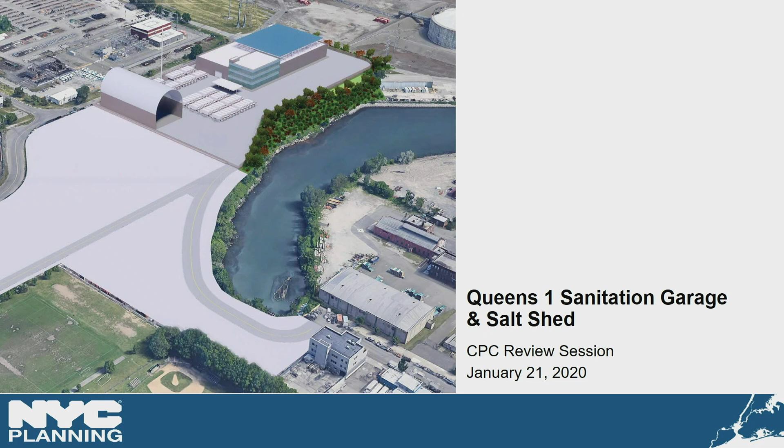Good afternoon, Commissioners. This is a city-sponsored application to facilitate the development of a new sanitation garage and salt storage shed in the Astoria Industrial Business Zone in Community District 1, Queens. Apologies, it's not advancing. Perfect, thank you.

The Department of Sanitation and the Department of Citywide Administrative Services seek to acquire an approximately 9.8 acre development site, as well as a vehicular driveway and a utilities easement. The requested actions would allow DSNY to build just under a 94,000 square foot sanitation garage and a 20,000 square foot enclosed salt storage shed with surface parking and fuel stations for DSNY vehicles. The sanitation garage would service Queens Community District 1, and the salt shed would service Districts 1 and 3.

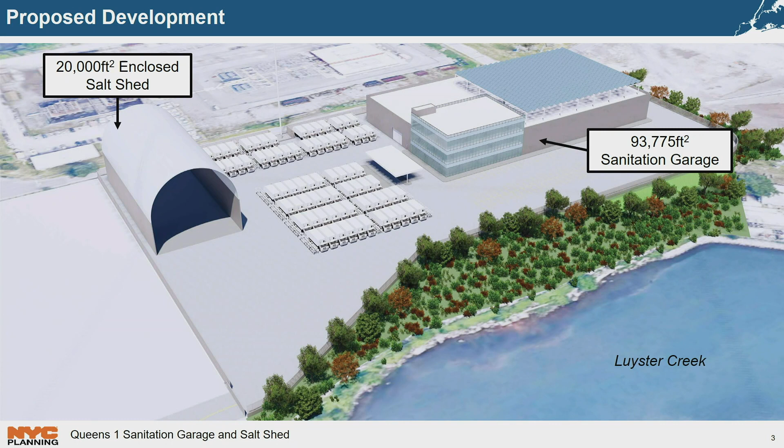The existing sanitation garage, shown here on the left, was constructed in 1931. It's surrounded by the Ravenswood Houses NYCHA community, and it is next to a playground. Local residents have expressed health and quality of life concerns for years due to the presence of diesel-powered sanitation trucks idling in this residential neighborhood. The garage is also structurally deficient and undersized for DSNY's current and future needs.

In 2017, Mayor de Blasio committed $130 million from his executive budget to build a new garage and relocate the services in this existing garage to a new location. DSNY is temporarily using a portion of the proposed site for vehicles that do not fit in this garage. On the right is an image of the existing unenclosed salt pile located in a mapped but unbuilt section of 43rd Avenue at the intersection with Vernon Boulevard. DSNY would relocate the salt pile as part of this proposal as well.

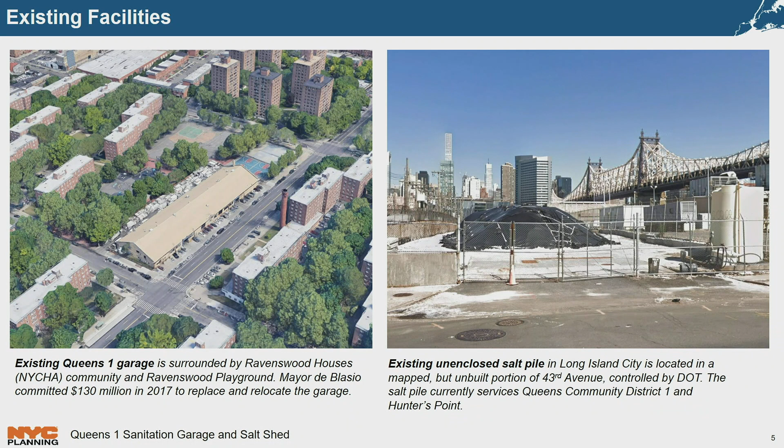The Q100 bus stops near the project area on 20th Avenue, providing access to Long Island City and Rikers Island.

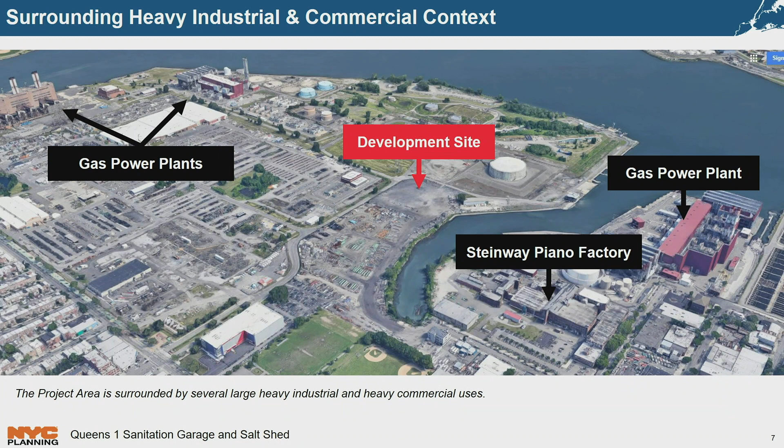DSNY did an alternate site analysis but found there were no city-owned sites of adequate size in the community district, and that other privately owned sites were not well located for efficient service delivery for the district garage. The industrial business zone is anchored by several large, heavy industrial uses, including 3 gas power plants and the Steinway Piano Factory.

This is an illustrative site plan of the proposed development. The development site, including the garage and salt shed, would be located on the northern end of the project area, shown here on the right side of the image. DSNY vehicles would access the development site through an entrance at 19th Avenue, at the bottom middle of this image. A utilities easement would also be established between the development site and 20th Avenue, shown on the left side of the image.

Remaining portions of the site would be privately owned and would primarily be used for vehicular storage by private companies.

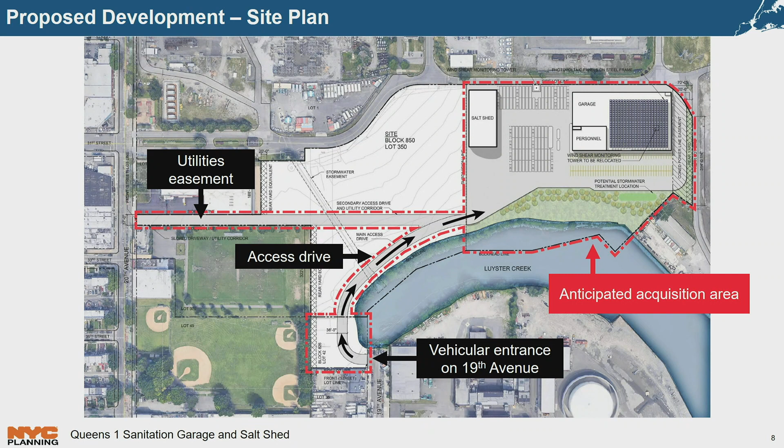The proposed facility would operate 24 hours a day, 7 days a week, with limited operations on Sundays. Their current facility in Ravenswood has about 155 total personnel, with about 75 personnel at their peak 6 a.m. to 2 p.m. shift. Their workforce would include field workers, as well as supervisors, mechanics, and clerical personnel who would work on site, and they would provide employee parking on site.

DSNY is also thinking proactively about the future of their facility. Their building would be designed for useful life through at least 2100, and therefore they would design for a 3-foot sea level rise over that period of time.

The garage, parking lot, fueling station, and salt shed would be built to an 18-foot design flood elevation, and mechanical systems and emergency generators would be placed on upper levels of the garage.

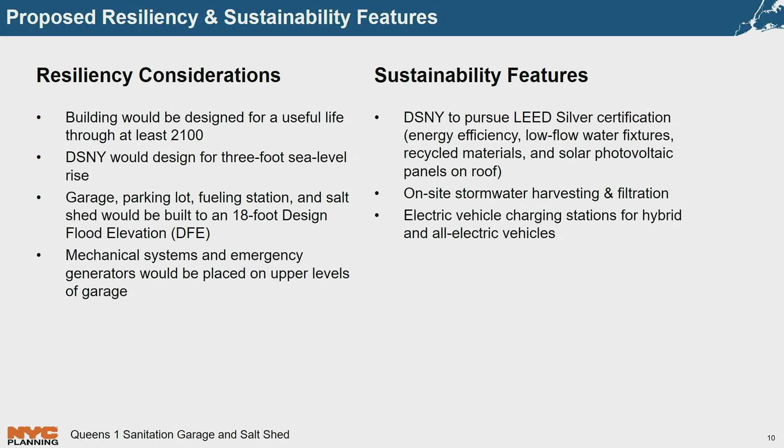DSNY will also seek LEED Silver certification for the garage, and among other features, it would include a solar photovoltaic panel system on the roof of the garage. They're also planning to include on-site stormwater harvesting and filtration of that stormwater on-site, as well as electric vehicle charging stations for their current hybrid and all-electric vehicles, and in anticipation of a future all-electric fleet.

DSNY believes the proposed site would be an appropriate location for the proposed sanitation garage and salt storage shed. This application is also the first step in the mayor's strategy to relocate and replace the current Ravenswood garage, which is not suitable for DSNY's needs or the surrounding community.

Thank you. Questions or comments from the commission?

Commissioner de la Uz: Thanks for the presentation, and it's great that the sustainability features are part of what's being highlighted and planned for, and the resiliency features as well. I'm wondering, when it comes back, if they could talk about whether or not they considered also doing photovoltaic panels above the parking. Sure.

Other questions? Vice Chair Knuckles: I assume an 80-year presence at the current site connotes city ownership, or does it? It is a city-owned site.

So at this point, is it too early to consider what the use would be for the current site? The city is exploring options, but the city is not able to provide a path forward at this time.

Well, whatever the decision, I would hope it would inure to the benefit of the NYCHA residents that have endured for so long the current usage. Absolutely. Other questions? Commissioner Levin.

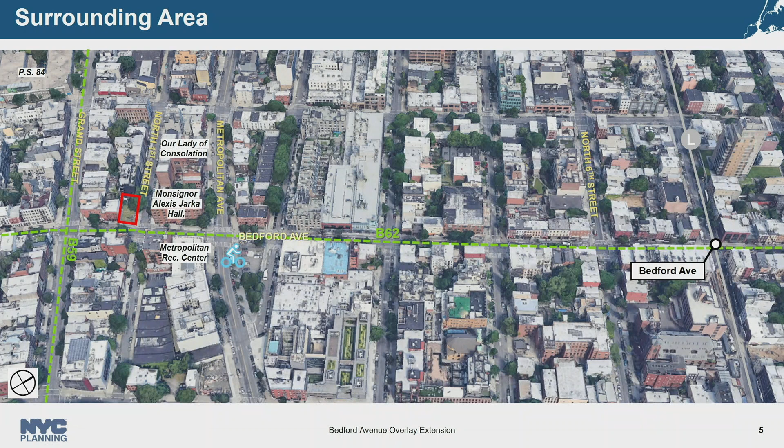The project area is located on block 2380 at the southwest corner of Bedford Avenue and North First Street, and is approximately 2,500 square feet, with a frontage of 100 feet on North First and 25 feet on Bedford Ave. Included in the project area is the development site and a portion of the adjacent lot, which is a condo building with 5 stories and 8 units.

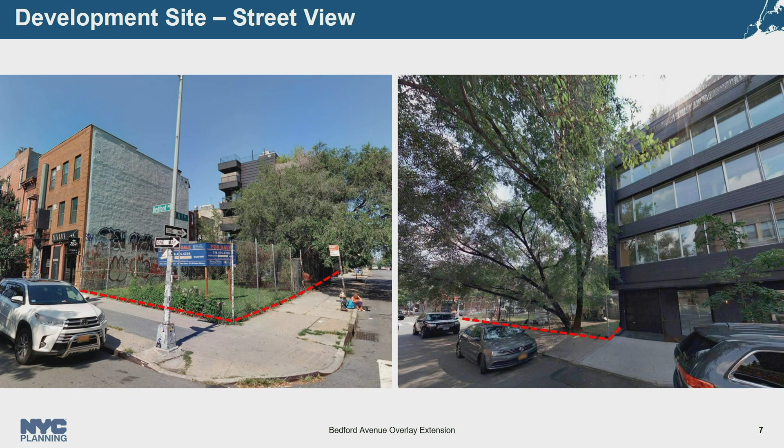Here we have Bedford Ave, a commercial corridor with ground floor local retail. This is the west side of Bedford, between Grand and North First. The development site is on the right, on the north side of the block, with mixed use and residential buildings adjacent. Both of these buildings have restaurants on the ground floor and residential units above. Across the street, on the eastern side of Bedford Avenue, is a similar mixed-use context with a cheese shop on the left with residential above, and a grocery on the right side.

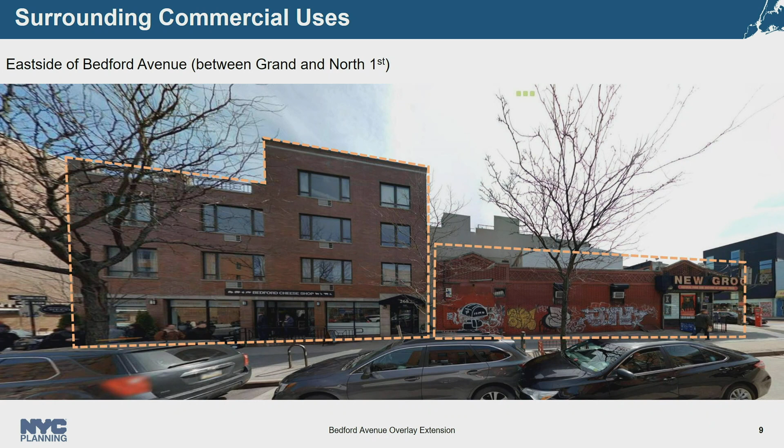The applicant proposes to construct a 3-story mixed-use building on the development site at 39 feet. The proposed development will be a full lot coverage building with a total of approximately 5,500 square feet, with 2,300 square feet of ground floor commercial use and 3,200 square feet of residential floors on the upper 2 floors. The development will also include a cellar level dedicated to storage for the ground floor commercial use and building mechanicals.

The applicant is seeking a zoning map amendment to establish a C24 commercial overlay in an existing R6B zoning district. This amendment is necessary to facilitate the development of a new mixed-use building on the development site and fully establish a C24 commercial overlay along Bedford Ave. The proposed zoning map amendment reflects the character and existing zoning of the area, where C24 commercial overlays are mapped over several blocks near the rezoning area.

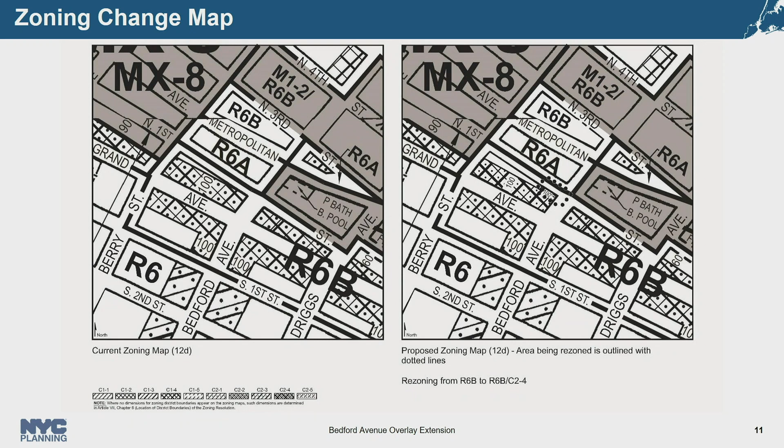As you can see from these 2 zoning maps, the existing overlay is mapped 100 feet from Grand Street, but due to the irregular shape of the block, it does not cover the northwest portion of the block on Bedford Ave frontage. So the proposed map amendment will map the C24 overlay over the remainder of the block. It will be 100 feet from Bedford Ave, thereby extending the overlay over the full portion of the block and Bedford Ave frontage. And that concludes my presentation.

Questions from the commission? Commissioner Bernie: Will the architect be coming to the public hearing? There are some strange things about the building design that we might want to discuss. I will note that, to see if it'll be a team presentation. At this point, we're at certification, and we'll see it again at pre-hearing review once we have the community and the borough president's input. Other questions?

Commissioner Levin: Well, I think I know the answer to this, but it seems odd that we would be zoning a portion of the adjacent lot, putting the overlay on a portion of the adjacent lot, newly constructed, unlikely to change its use. Why are we not just mapping the site itself?

So we're mapping it 100 feet from Bedford Ave, so it covers a portion of the adjacent lot. Having a rational zoning map was the reason for having it 100 feet from Bedford Ave rather than just the site. Yeah, okay, I figured that was the answer.

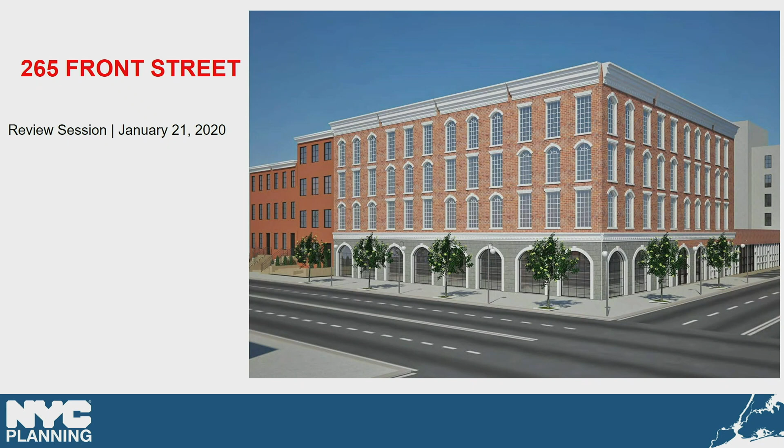The third item on our agenda, page 48, is a certification of a zoning map and zoning text amendments in Brooklyn Community District 2. Syed Ahmed is our presenter. Good morning, Commissioners.

This is a private application requesting a zoning map amendment from an M12 to an R6A C24 district and a zoning text amendment to establish the project area as an MIH area. The proposed actions would facilitate a mixed-use 4-story building with 9 apartments and approximately 5,000 square feet of ground floor commercial space.

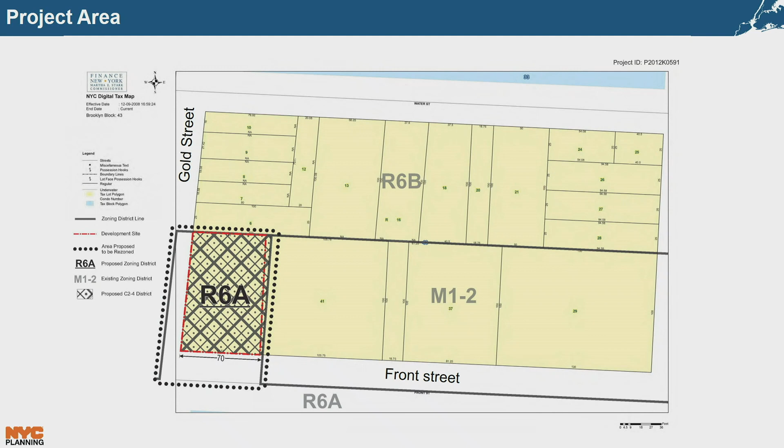The project area is located at the northeast corner of Gold and Front Streets in the Vinegar Hill neighborhood of Brooklyn Community District 2. Vinegar Hill is a small neighborhood with 2 to 3 story historic residential buildings, residential and commercial loft buildings, and industrial uses. This small neighborhood is surrounded by large-scale city infrastructure.

To the north, several blocks along the East River waterfront are zoned M31 and are occupied by Con Edison's Farragut electric substation and a steam generating plant. A block to the east is the 225-acre Brooklyn Navy Yard. Area to the south is zoned R6A and is developed with PS 307, NYCHA's 1,400-unit Farragut houses, and the entrance to the Brooklyn-Queens Expressway. The area to the west is developed with a mix of residential and commercial loft buildings, industrial uses, and Manhattan Bridge.

In 1997, the Landmarks Preservation Commission designated 3 small clusters of row houses dating back to the 1780s as Vinegar Hill Historic District. Area 2 of the historic district, consisting of 5 attached homes, is directly north of the project area.

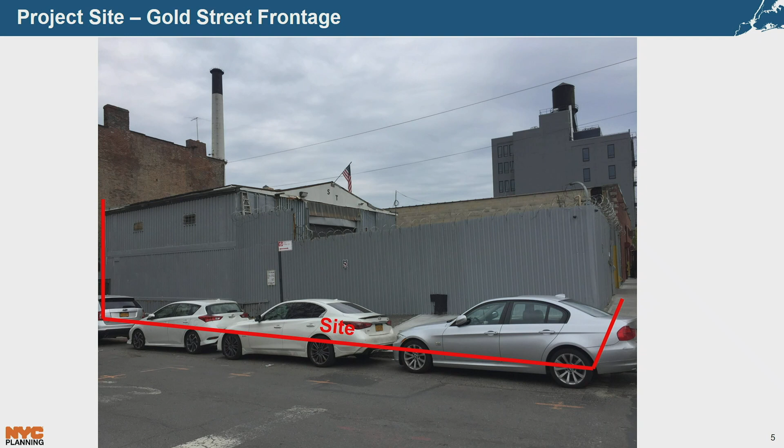The applicant site is a corner lot currently occupied by a storage shed and a parking lot.

The subject block is split into 2 zoning districts. The northern half is in an R6B residential district consisting of 16 tax lots, 10 of which are developed with residential buildings containing 28 dwelling units. The remaining 6 lots in the middle of the block are used for warehousing and open storage.

The southern portion of the block is zoned M12, comprising 4 industrial lots, including the applicant's Lot 1 at the corner of Gold and Front Street. These lots are used for industrial uses, including open storage and warehousing.

The project area is well served by public transit. The F-Line York Street Station is 2 blocks west of the site. B62 and B67 bus lines also serve this area.

The proposed rezoning will extend an existing R6A district from the south side of Front Street at a width of 70 feet from Gold Street onto the project area.

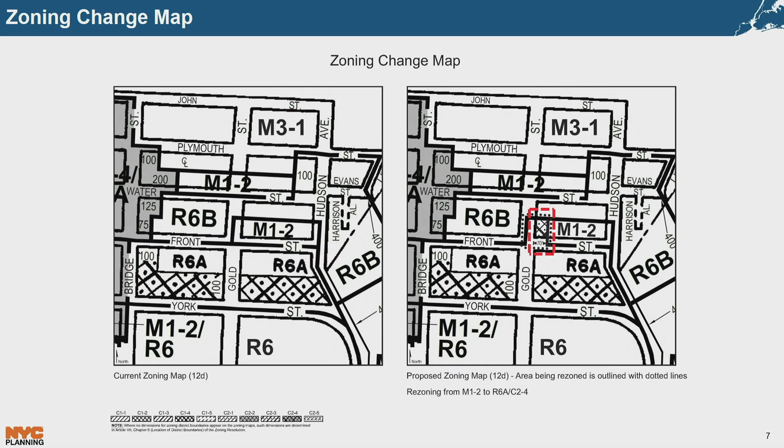Commissioner De La Uz: It'd be helpful when this comes back to find out if they have an intended use for the commercial space. It seems like you already have an answer. No, I will find out. Okay.

And obviously, when it comes back, I'd like to understand the rationale for mapping MIH option 2 versus option 1 and 2, despite the fact that they're below the threshold. Yes, they are building below the threshold because height is an issue, and they have approached the community board two, presented this project, and they have gotten positive feedback, and that's their explanation. Positive feedback on option 2, or positive feedback on FAR? Okay, yeah, that's different.

Yes, I hear that piece of it, considering the historic district in the area. They proposed option 2, and I know, but because we might see other applications similar to this in the future, and given the need that exists in the community, and the fact that one application kind of lays the groundwork for the next one, I would like to know the rationale for only mapping one of the two options that exist. When they come back, ask them for that rationale. When they come back, yes.

Great, thanks. Other questions? Commissioner Levin: Sorry, it's been a long time since we've seen you, so hope you've been good. Yes, I have. I have a question about the proposed zoning that's being mapped here.

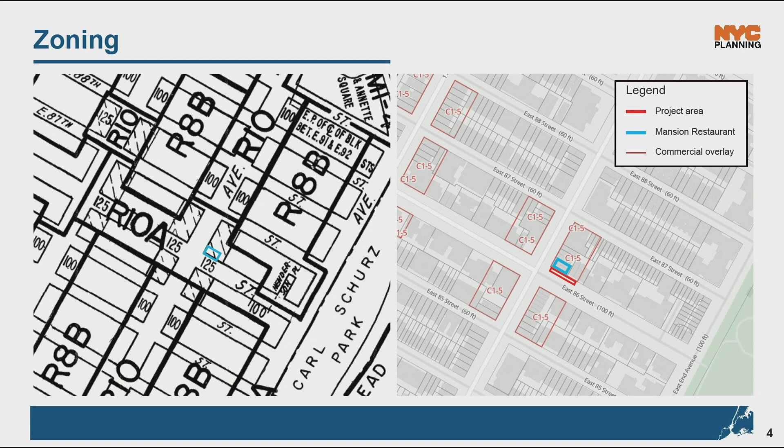The present mapping of sidewalk cafes in the area is shown here. The Mansion Restaurant can be seen in blue. The category of unenclosed sidewalk cafes was established in 2004 and broadly mapped via CPC action.

It is defined as an outdoor area on the public sidewalk in front of the restaurant that contains removable tables and chairs. The general approach taken to mapping sidewalk cafes can be seen to follow a pattern of tracing the avenues and then extending no more than 125 feet along each street toward the mid-block, matching the commercial overlay.

The exception of this is 86th Street. Between the East River and 5th Avenue, 86th Street was removed from the 2004 action at recommendation of Manhattan Community Board 8. The recommendation was made due to a streetscape improvement plan for the East 86th Street corridor, which had been proposed by the 86th Street Neighborhood Association. CB8 stated in its 2004 resolution, this prohibition for 86th Street may be revisited at some future time.

The portion of 86th Street identified in purple reflects a 2008 CPC action to allow the length of 86th Street from 1st Avenue to a distance 125 feet from 2nd Avenue to permit small sidewalk cafes. That action permitted the Maz Mezcal restaurant to apply for and operate a small sidewalk cafe in a similar manner to that proposed by the current application.

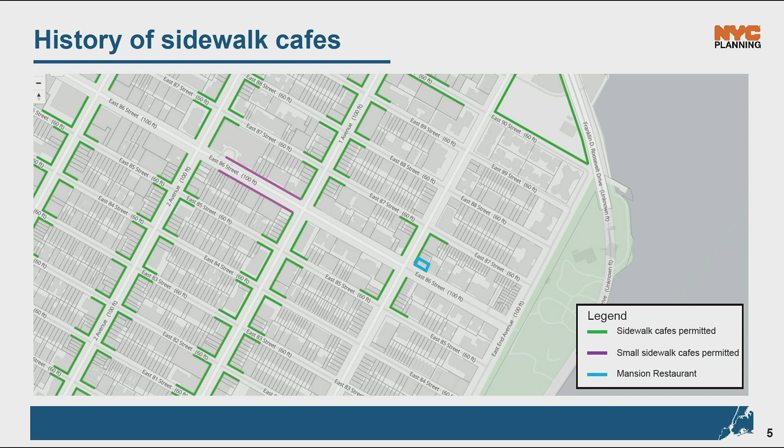The 86th Street Streetscape Improvement Plan, noted in 2004, was updated and implemented by DOT and DDC in 2015. The intent of the plan was to make improvements to the thoroughfare while facilitating the M86 SBS bus service, which runs along 86th Street and to the north on York Avenue, which you can see in the map there.

Improvements included the addition of bus boarding bulbs and neck downs at intersections, as well as landscaping and adding street furniture. The project area is not located in proximity to any of the infrastructure related to the M86 SBS service, nor other improvements made as part of the 86th Street Streetscape Improvement Plan.

So the proposed extent of unenclosed sidewalk cafe for the Mansion Restaurant is highlighted here in red. The proposal will amend Section 14-41 of the zoning resolution to allow sidewalk cafes in the project area only. It also amends 14-42 of the zoning resolution to clarify that enclosed sidewalk cafes are not permitted on 86th Street between the East River and 5th Avenue.

The proposed 125-foot extent of the project area is consistent with the length applied to sidewalk cafes along streets in the area and corresponds with the extent of the C1-5 commercial overlay. The Department of Consumer Affairs applies design and operational regulations to sidewalk cafes through licensing. Through this license, the applicant would expound on matters including table and chair layout, clear paths along the sidewalk in lieu of obstructions, which is generally required to be 8 feet, staff servicing, associated canopies, and operation hours.

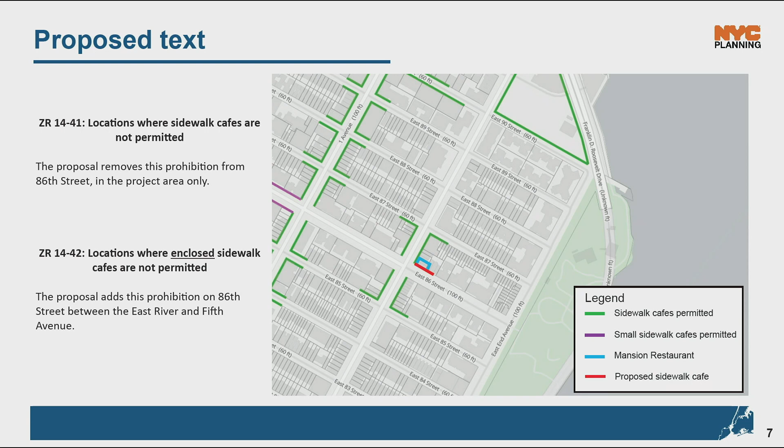In summary, the application does not involve any construction, nor does it request any layout endorsement from the CPC. The applicant seeks only approval for a zoning text amendment for Section 14-41 and 14-42 of the zoning resolution. Subject to licensing, the text amendment would allow a 125-foot length of the sidewalk on the northern side of 86th Street to be used for unenclosed outdoor cafe purposes. Happy to take any questions you might have.

Questions from the commission? Commissioner Burney: So would this text amendment apply to other properties now that might want sidewalk cafes on 86th Street, or only to this applicant? Response: So to this applicant, but it also extends 125 feet into the block. So the Mansion Restaurant takes up 75 feet of that. The neighbor that is under construction, the taller building right next to it, has some frontage that would then be allowed to have sidewalk cafes if they applied for a license.

But the DOB filings of that indicate that it's not intended to be used for retail, so whether they would have any utility for that would be the question. But if we've decided that the streetscape studies has been completed and executed, and now the reason to have a ban on sidewalk cafes is no longer relevant, why wouldn't we just change it for the whole of 86th Street? Yes, that would make a lot of sense.

That would also be quite a heavy ask for a private applicant to be able to facilitate the whole of 86th Street. There would likely be some environmental review implications and things like that, so that would potentially have to be more of a departmental initiative.

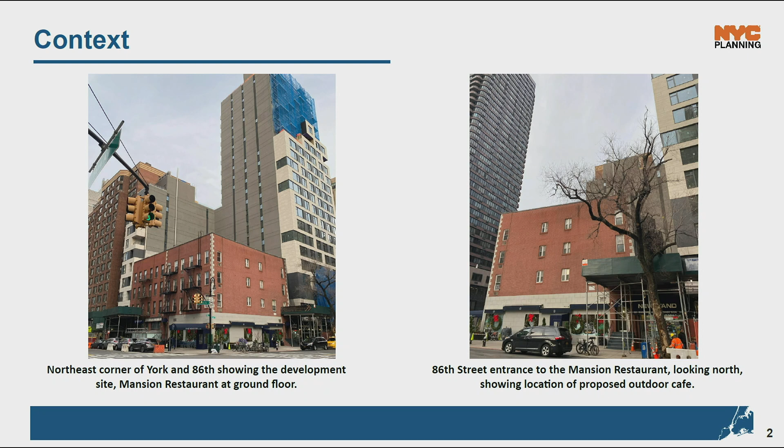Other questions? Okay, so this will get referred to both the community board and the borough president for 45 days. Thank you.

The fifth item on our agenda, page 87, is a pre-hearing review of a notice of intent to acquire office space in Queens Community District 7. Our presenter is Kai-Kung Yang.

This is a notice of intent by DCAS and Queens Community Board 7 to acquire 1,900 square feet of office space at 30-50 Whitestone Expressway, College Point, Queens, Community District 7. Queens Community Board 7 is seeking relocation of office space because their current lease is not being renewed by the landlord. The proposed office space is within the Special College Point District, created in 2009 to facilitate business park development.

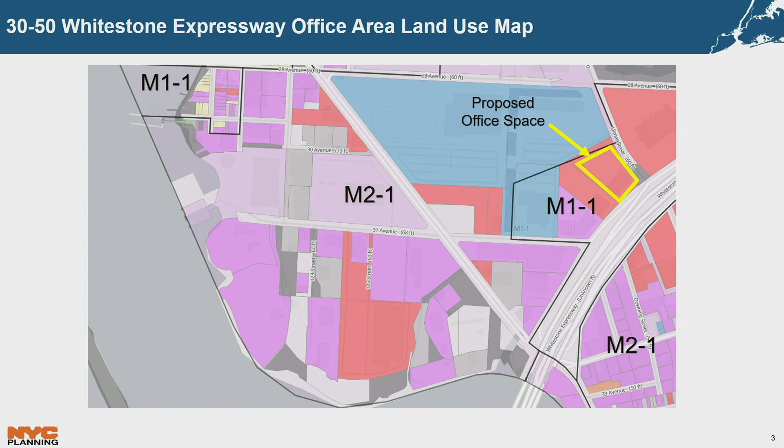It's located in an M1-1 zone, which permits light industry uses at an FAR of 1.0.

The office space would be relocating from downtown Flushing, approximately 1 mile north to 30-50 Whitestone Expressway between Ulmer Street and 31st Avenue. Nearby transit includes the Q25 at the Whitestone Expressway and Linden Place intersection, one block north, and Q65 at the College Point Boulevard and Whitestone Expressway intersection, 1 block south. Approximately a mile to the south is the termination point of the 7 train in Flushing, as well as the Port Washington LIRR station.

Nearby development is a mixture of corporate business parks, big box retail, municipal agency operations, and open industrial uses. Adjacent uses include the multiplex cinema movie theater located adjacent to the north, a beauty supply warehouse, and an office of an electrical company located adjacent to the south. There is also a high concentration of public facilities within a few blocks, including the DMV, NYPD's Tow Pound and Police Academy, and further west, the Department of Sanitation's North Shore Marine Transfer Station.

The 30-50 Whitestone Expressway building is a 4-story, 105,000 square feet office building with approximately 310 surface parking spaces. Uses in the building include several office uses for insurance companies, a nursing school, an accounting firm, and supermarket association. This office would host Queens Community Board 7 for a 20-year lease period.

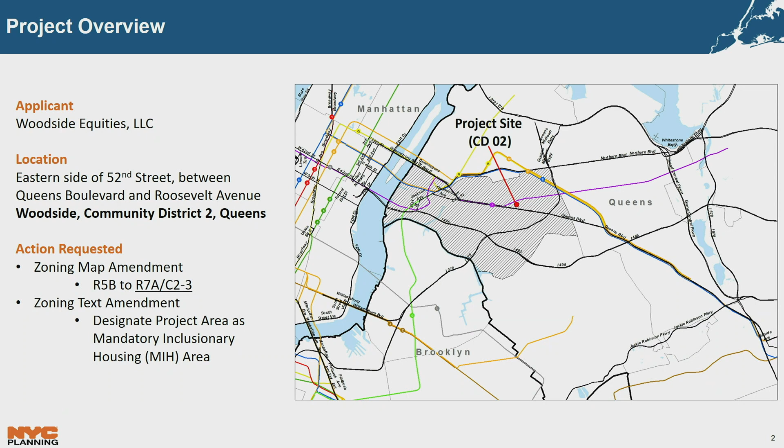A zoning text amendment is also proposed to designate MIH. Quick background on land use actions in the area: the project area, located on the eastern side of 52nd Street between Queens Boulevard and Roosevelt Avenue, was rezoned from R6 to R5B in 1992, a result of the city-sponsored Woodside rezoning.

In 2006, the Maspeth Woodside rezoning changed the M1-1 district to the west to R6 C2-3, and the C8-1 to the south along the Queens Boulevard corridor to R7X C2-3, also establishing the borough's first MIH area. The project area was not affected. The Sunnyside Woodside rezoning added some contextual districts to the north; again, the project area was not affected.

Surrounding area is characterized by a mix of types and densities, mixed use higher density along Queens Boulevard, lower density to the east.

The project area consists of approximately 33,000 square feet across portions of 11 tax lots. The development site owned by the applicant occupies tax lots 12, 15, 16, and 17, approximately 15,000 square feet. Lot 12 is occupied by a warehouse that has been vacant since 1996.

Until that time, the applicant operated a baby accessories and clothing distribution facility here. They have since moved to Jamaica, where they still operate. The 3 other tax lots of the development site are currently vacant. The 2 lots south of the development site, lots 10 and 7, are occupied by a 2-story house of worship and a 1-story non-compliant auto repair shop.

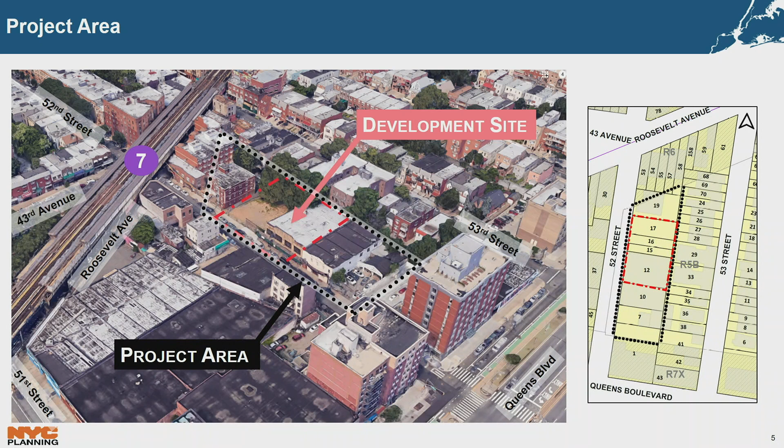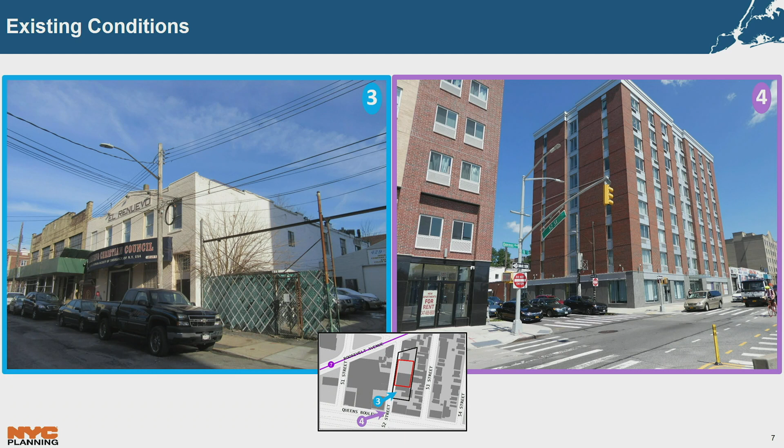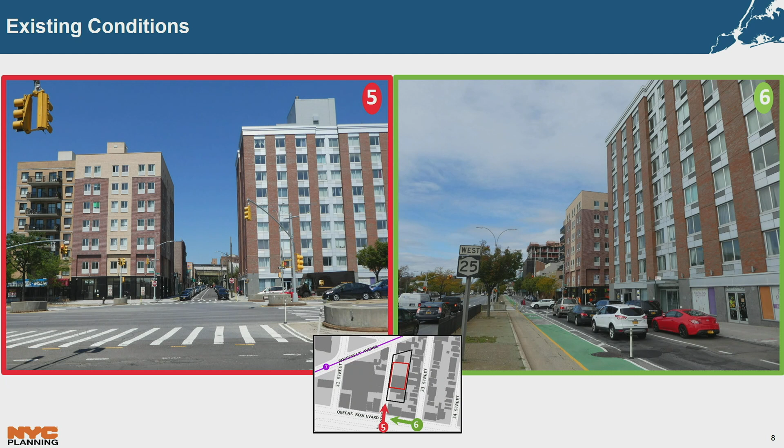You'll see a lot of green fence lining up here. There's a lot of active, as-of-right construction projects going along here.

When certified, the proposed development was an 8-story building containing 61 units with rather underwhelming illustrative drawings. The applicant has since updated their drawings, but also the programmatic side of the project.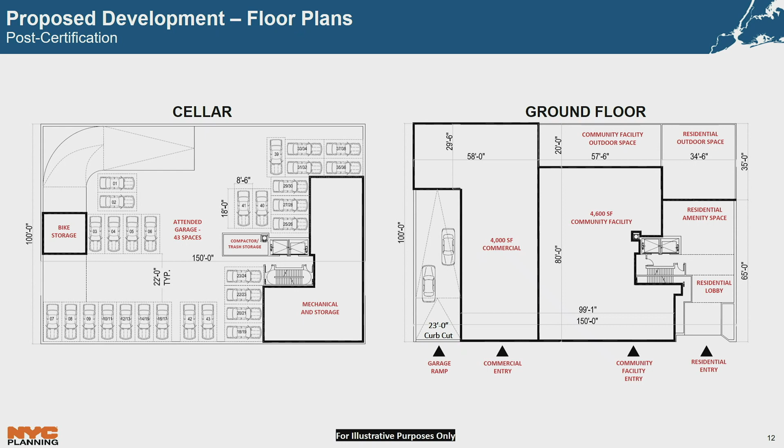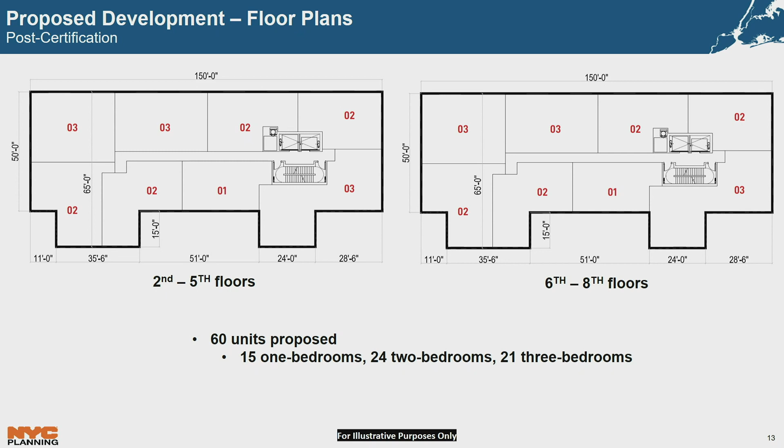Here are drawings of the floor plans showing the mix proposed currently: 15 one-bedrooms, 24 two-bedrooms, 21 three-bedrooms. This was in response to Community Board 2's request for additional family-friendly dwelling unit sizes.

They're proposing to map both options 1 and 2 for flexibility. They have engaged with an affordable housing consultant, and they expect to be able to expand more on the preference for option 2 while still mapping both 1 and 2.

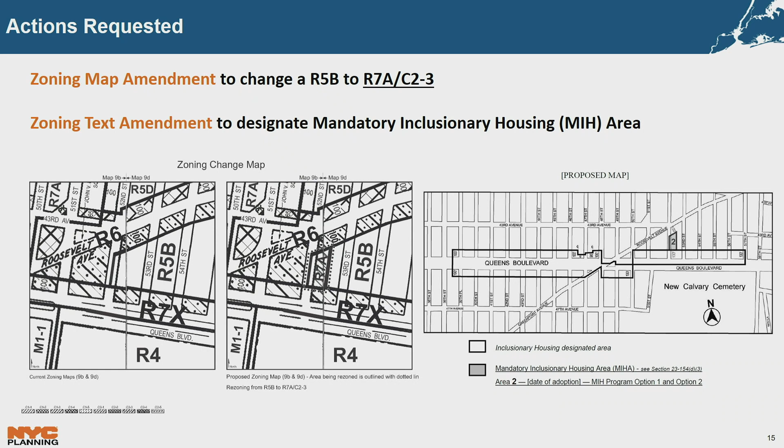On November 7th, 2019, Community Board 2 adopted a resolution recommending approval, 18 in favor, 11 opposed, 0 abstaining, with the condition that community facility space be set aside on the ground floor, preference for a green roof, and other environmentally friendly design standards be used. The architect tomorrow will go into detail on how those will be used.

A preference for option 1 to be mapped. Also, as with prior projects in Queens, this sort of fell through the cracks of the borough president. There were one or two others that fell through, but she did not schedule a hearing nor issue a recommendation. And that is the conclusion.

Questions from the commission? Commissioner Levin.

I gather the community facility space came about at the request of the community board? Yes. Do they have a particular tenant they'd like to see in that space? Yeah, there is preference for anything other than essentially medical offices, maybe a UPK type of facility. It's a rather small square footage that may not be conducive to that. There was discussion about recommending or requiring that a local nonprofit community facility be used, which generally indicates anything other than doctor's offices. Okay, but they didn't have any suggestions about who that would be? Not specifically. Thank you.

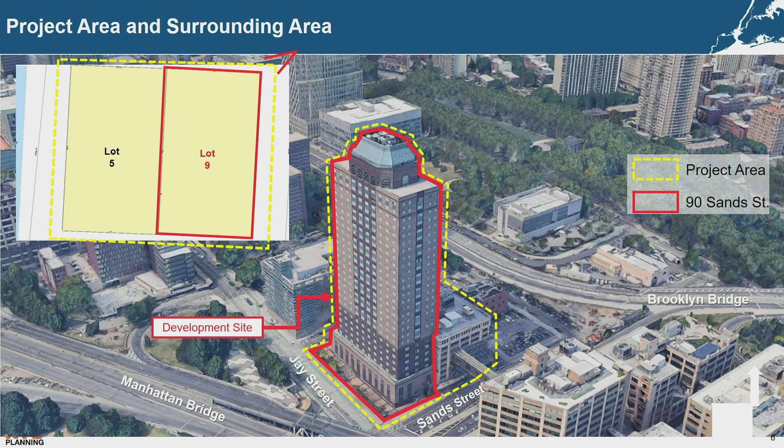The surrounding area contains a mix of uses, including medium and high-density residential, commercial, and community facilities, as well as numerous open spaces. The site is also transit-oriented with access to the A, C, and F trains, as well as the B67 and B69 bus lines.

The applicant is proposing to convert the existing 90 Sands Street building on Lot 9 to a community facility containing 508 units of supportive and affordable housing for low and moderate income tenants. The project would include 305 supportive housing units for the formerly homeless and 202 affordable housing units targeted to households earning 30 to 100% of the area median income.

In response to questions raised by the commission at certification, the applicant team will speak in more detail on the breakdown of units at tomorrow's public hearing.

The redevelopment would also renovate the building's lower floors to include a reception desk with security staff on site 24/7, and would include tenant amenities such as a laundry room, fitness room, and a computer lab. There will also be office space for the building management, as well as for the Center for Urban Community Services, who will provide on-site social services to residents of the building, including case management, primary medical care, mental health services, employment readiness guidance, and benefits counseling.

In addition, the applicant intends to lease a portion of the cellar level to a tenant that would provide space for a community facility, commercial, or light industrial use. However, a tenant has yet to be identified.

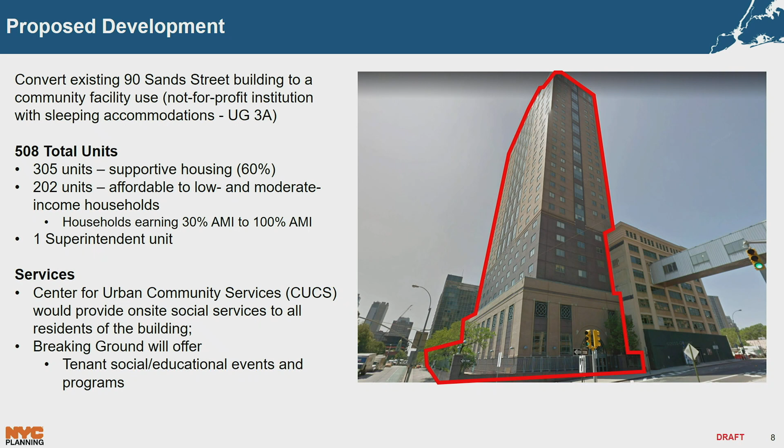The currently gated plaza along Jay Street will also be improved and open for public use after the applicants obtain a chairperson certification, which will be filed in the near future. The applicants are also prepared to share an overview of the planned plaza at tomorrow's public hearing. The architect will be on hand.

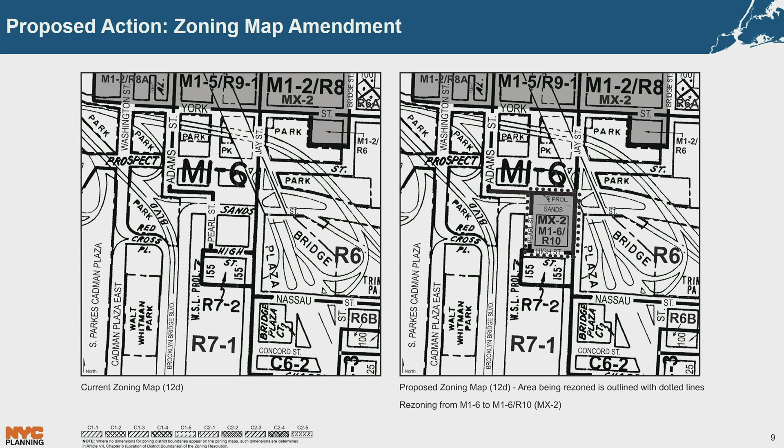The project area is currently within an existing M1-6 district. To facilitate the proposed development, the applicant proposes a zoning map amendment to rezone the project area from an M1-6 district to an M1-6/R10 district and to establish a special mixed-use district. The proposed mixed-use district would maintain the existing bulk regulations and would newly permit community facility and residential uses, allowing the existing 90 Sands Street building to be converted to community facility use.

Second, the applicant proposes a zoning text amendment to Appendix F of the zoning resolution to create a new mandatory inclusionary housing area. The applicants are proposing to map both MIH option 1 and 2.

On November 20th, 2019, Community Board 2 held a public hearing, and on December 11th, they voted to approve the project, 39 in favor, 0 opposed, and 0 abstaining. The Brooklyn Borough President held a public hearing on December 10th. However, we have not received the recommendation yet.

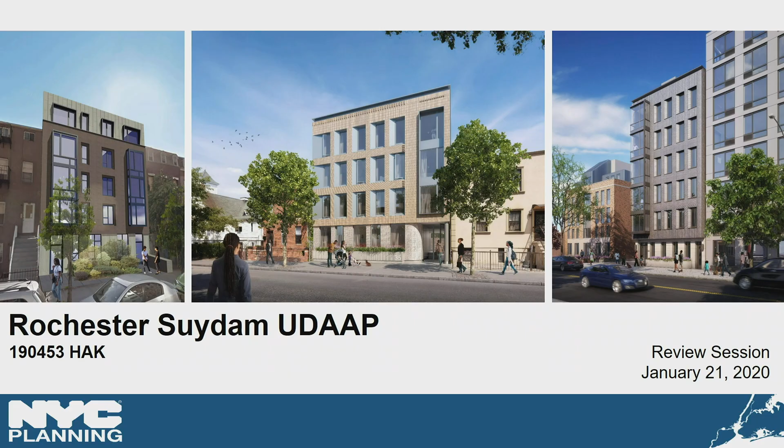Good afternoon, Commissioners. This is an application coming back from referral by the New York City Department of Housing, Preservation, and Development for a UDAAP designation, project approval, and disposition for 13 vacant city-owned lots to facilitate the construction of 7 residential buildings with approximately 78 units of affordable homeownership housing.

The proposed developments are in the southern part of the Bedford-Stuyvesant neighborhood in Community District 3 in Brooklyn. The sites are all located between Fulton Street, which is a local commercial corridor, and Atlantic Avenue, which is a main thoroughfare with uses ranging from residential to light industrial.

Significant institutions in this area include Interfaith Medical Center near Cluster 1 and Boys and Girls High School, which is in between Cluster 1 and Cluster 2. This area is well served by transit, and each site is within 2 blocks of the subway and 2 bus routes. We'll now take a closer look at each of the clusters.

This first cluster is the westernmost one and includes development sites 1 and 2 located on Herkimer Street. These sites are in an R6A district, a contextual district that allows 3 FAR for residential use and allows buildings with street walls up to 60 feet high and a maximum building height of 70 feet.

Sites 1 and 2 both front on Herkimer, which is residential, with 2 to 4 story row houses and apartment buildings up to 6 stories.

Here you see the development sites as viewed from Herkimer Street. Each site is an assemblage of 2 interior lots with 40 feet of frontage and an area of 4,000 square feet.

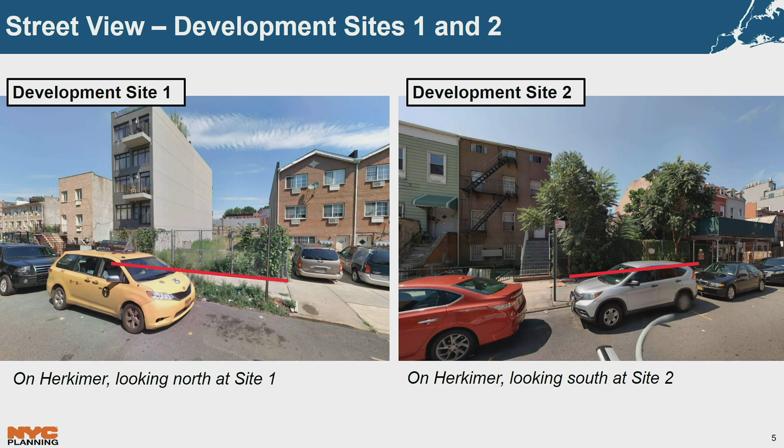These developments proposed for these sites will be the same design and will be built pursuant to the current zoning, which is R6A. Each building will contain 10 units at approximately 11,400 square feet and will be 5 stories at 52 feet tall.

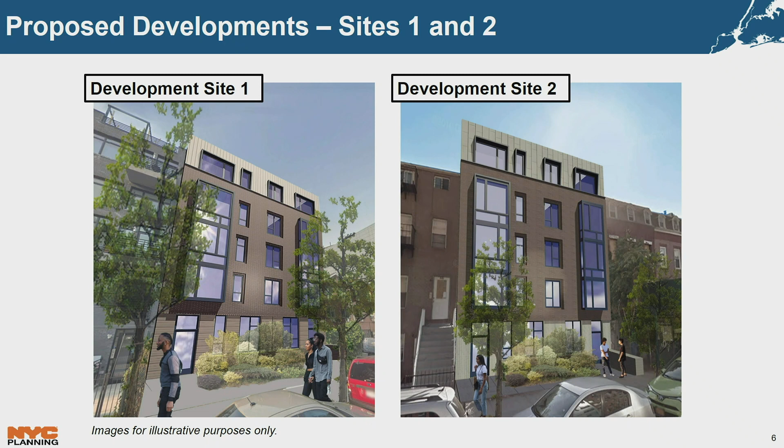This second cluster is about half a mile east of the last one and has similar land uses and zoning. The 3 sites in this cluster are within an R6B zoning district, which is a slightly lower mid-density contextual zoning district than the R6A zoning district of sites 1 and 2.

R6B allows 2 FAR for residential use in buildings with a street wall up to 40 feet tall and a maximum height of 50 feet. Most of the surrounding buildings in this area are 2 to 4 story row houses and apartment buildings up to 7 stories.

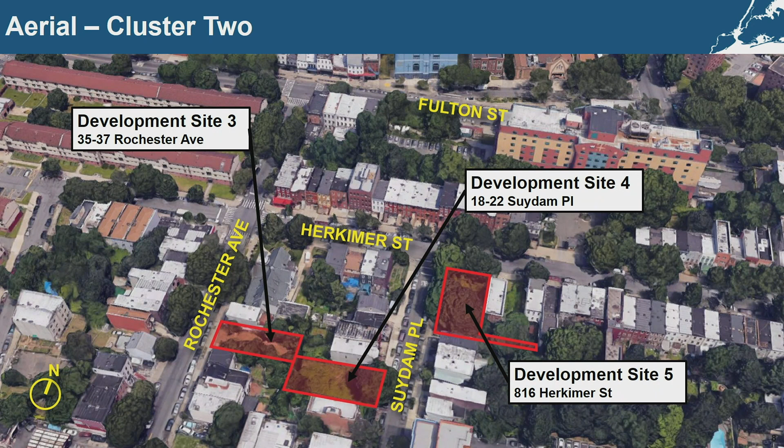Site 3 is the first site in this area, on the east side of Rochester Avenue, just south of Herkimer. It's composed of 2 tax lots with 42 feet of frontage and approximately 4,100 square feet in area.

The proposed development will contain 8 units in a 7,500 square foot building, a 4-story building that's 40 feet tall.

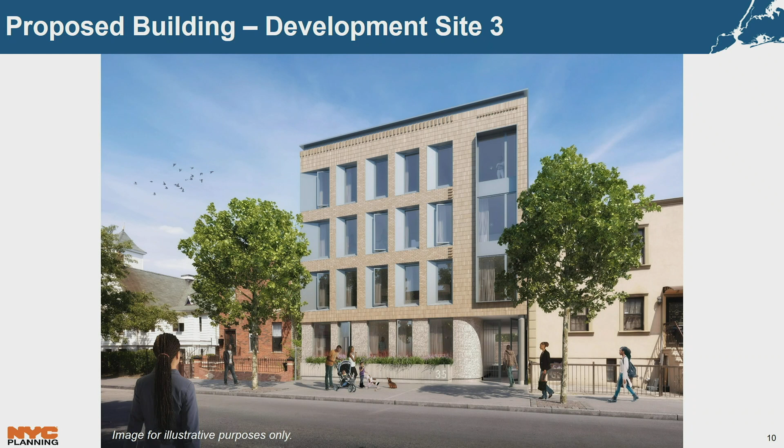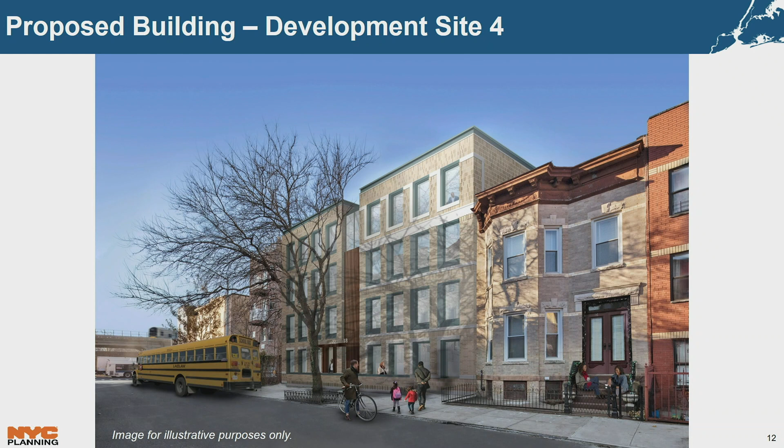Site 4 is located on the same tax block, but fronts on Suydam Place, 1 street over. This is an assemblage of 3 tax lots with 63 feet of frontage and a total area of about 6,100 square feet. The development on site 4 will have 15 units in approximately 11,700 square feet in a 4-story, 40-foot tall building. Zoning requires 8 parking spaces for a development of this size, but a zoning override was obtained to waive this requirement, so the building does not include any off-street parking.

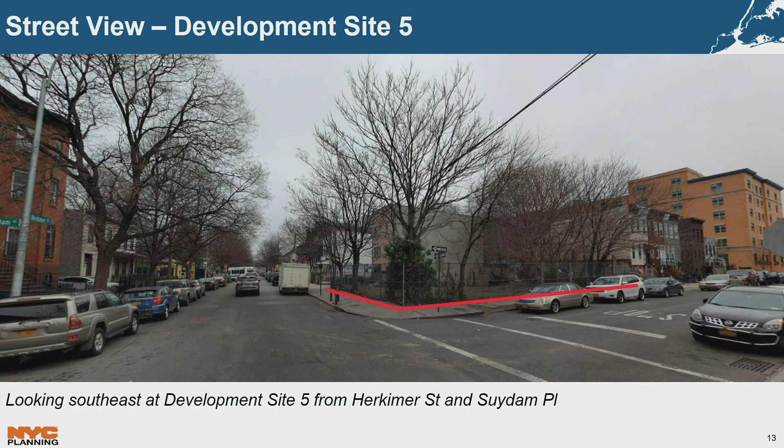The next site, number 5, is across the street and is a 6,000 square foot irregularly shaped corner lot with 52 feet of frontage on Herkimer and 105 feet of frontage along Suydam Place. The development for this building will also be a 40-foot tall, 4-story building. This will have 12 units and approximately 10,700 square feet. A zoning variance was also obtained for this development to waive the 6 parking spaces that would be required.

The last project cluster is about a 1/4 mile east of cluster 2 and has generally similar zoning and land uses, though there is an MX10 special district with underlying M1-1 and R7D districts and a coterminous inclusionary housing designated area mapped along Atlantic. So the 2 sites here, 6 and 7, one of them is in an R6B district, which has the same bulk regulations as the last sites we looked at, and then site 7 is located in that MX10 special district, and so it's subject to the base bulk regulations of R7D districts, which is 4.2 residential FAR, and allows for 10-story buildings with an 85-foot base height and 100-foot maximum building height.

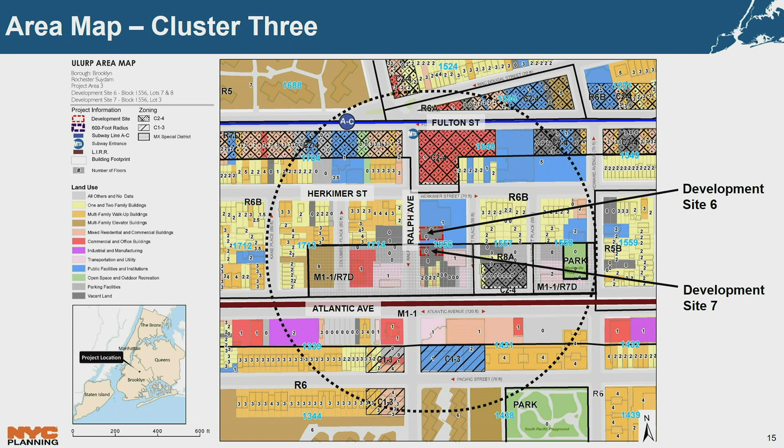So sites 6 and 7 are both interior lots that front on Ralph Avenue, just south of Herkimer Street. This area has more varied building forms than the last clusters, with 2 to 3-story row houses and 1-story retail with parking lots, as well as some 1-story industrial buildings.

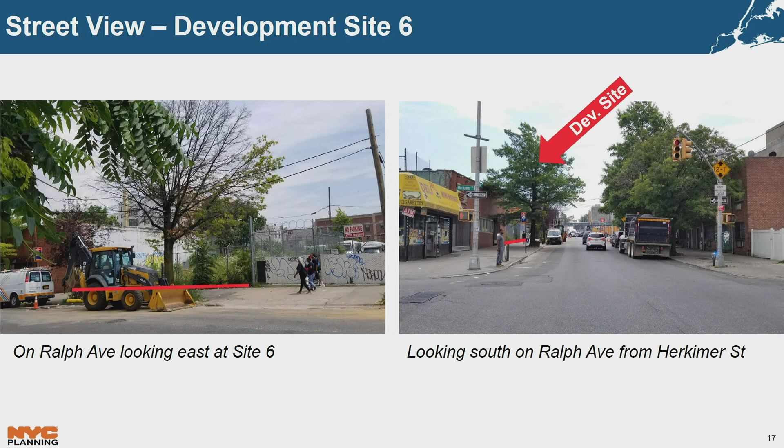Site 6 is made up of 2 lots with 50 feet of frontage and approximately 4,500 square feet of lot area. The development proposed for this site is subject to R6B zoning regulations. It will be a 5-story, 8,600 square foot building with a 40-foot base height and a total building height of 49 feet 6 inches tall. It'll have 10 units.

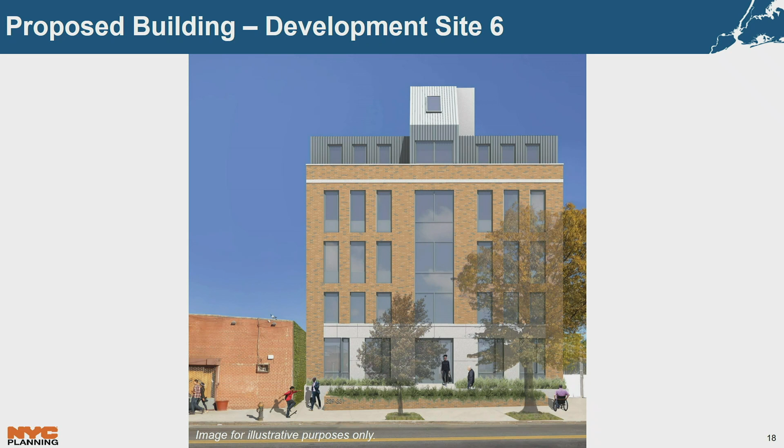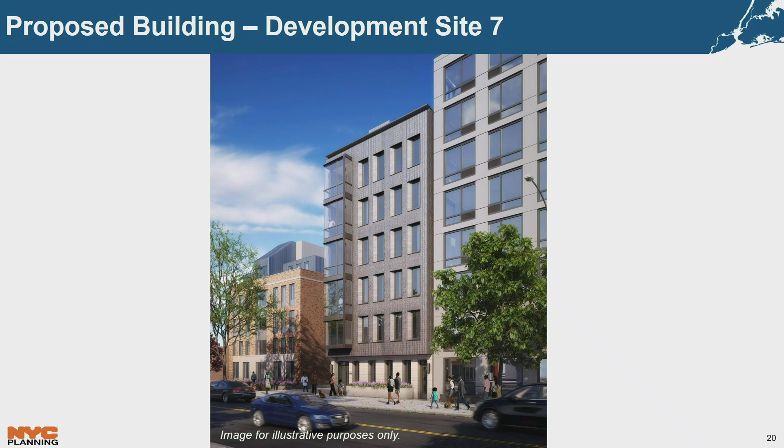So just to summarize, this application is for UDAP designation, project approval, and disposition of 13 lots. And in total, there will be 7 developments with 78 dwelling units. They'll all be affordable homeownership housing.

This application was certified on October 15th of 2019. Community Board 3 held their hearing and voted to approve the application on December 2nd with 37 in favor, 1 against, and 0 abstaining. The Brooklyn Borough President's Office held their hearing on December 10th and recommended approving the application with conditions in HPD's land use agreement.

So they recommended memorializing some sort of mechanism for permanent affordability, memorializing having more family-sized units and more units at lower income tiers, as well as the utilization of a local nonprofit group as a marketing partner, and then the incorporation of building and site-based sustainability strategies. The public hearing for this will be January 22nd, and the deadline to vote is March 9th.

I'll now take any questions you have.

Vice Chair Knuckles: Thank you. So has the developer been designated as of yet?

Yes, HPD has a development team. I'd be interested at the public hearing to know what measures are going to be taken at these various sites, because with the exception of Site 7, which is a larger building than the other sites, which are infill development for the most part, what kinds of mitigating measures are they going to take so that the construction would have as little impact on the surrounding areas? I'm talking about hours of construction and that kind of thing.

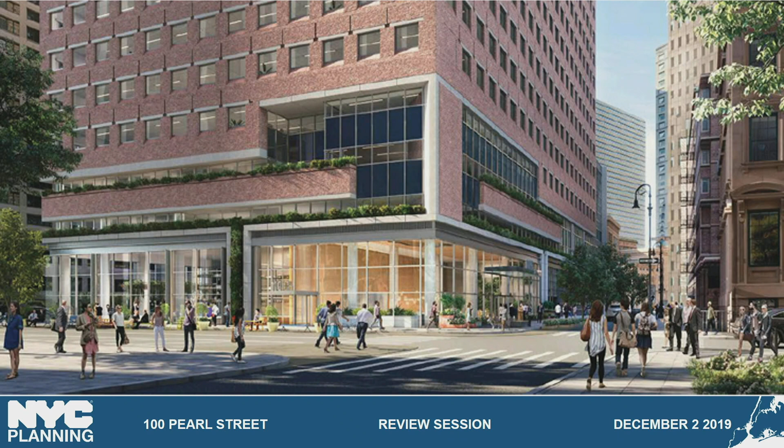Today, I will share a modified design put forth by the applicant based off the Commission and community feedback.

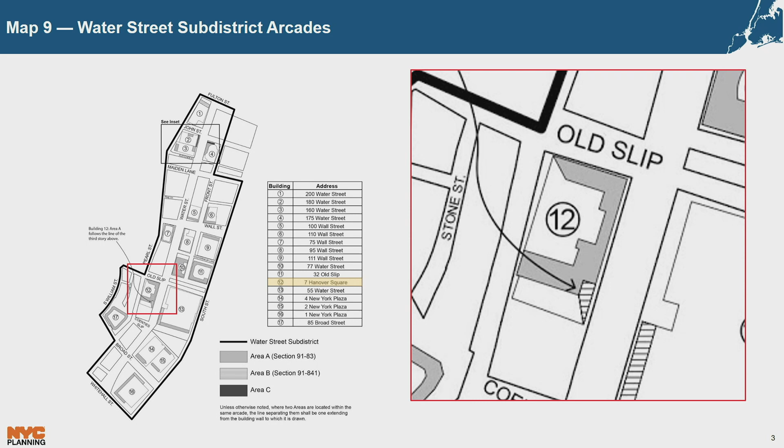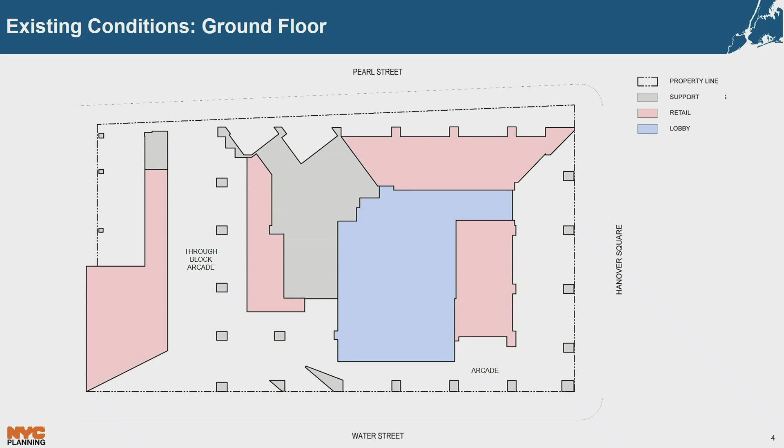Here we see the existing building's ground floor plan, which includes a through-block arcade connecting Pearl Street and Water Street, as well as an L-shaped arcade running along Water Street and Hanover Square. The indoor portion of the building contains primarily office lobby use, support use, and retail uses.

The proposed approximately 7,000 square foot horizontal enlargement is located within the building's existing through-block arcade and certain ground floor spaces that did not generate a floor area bonus.

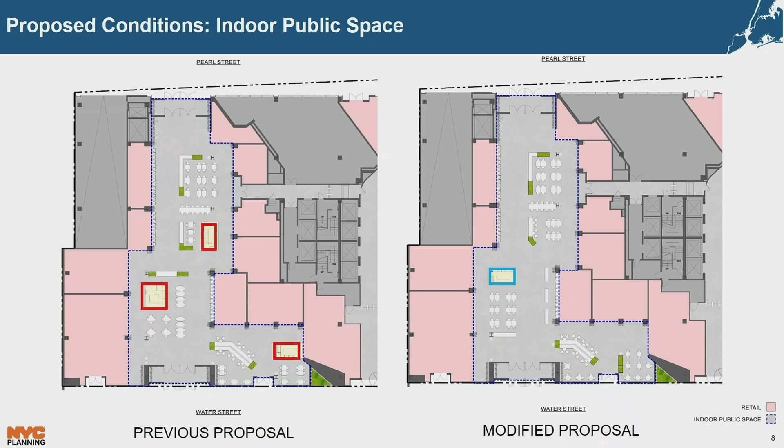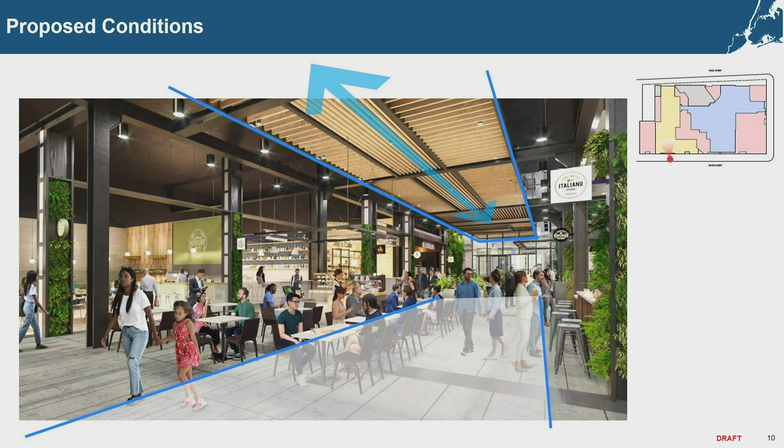The applicant also states that certain proposed design elements, such as the decorative canopy shown here, will assist pedestrian wayfinding through the space. Here we see the continuation of the canopy outside in the form of an awning, again signaling the public nature of the space, as well as the highly transparent frontage and the public space signage, which will indicate that the space is public and the hours of operation.

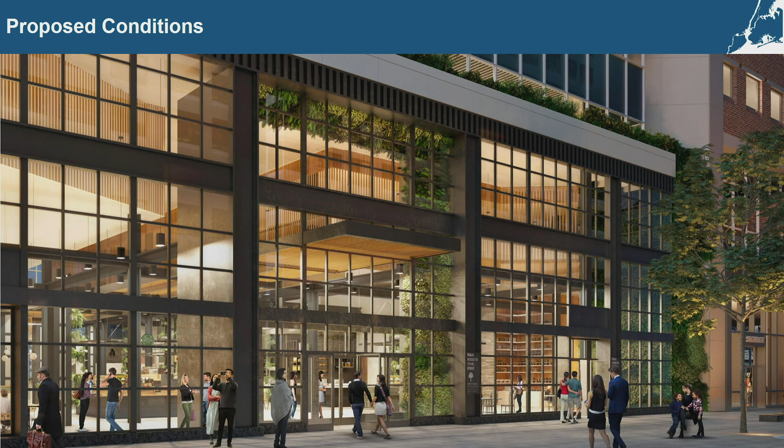The applicant is seeking 2 authorizations from the commission. The first authorization is needed to permit the horizontal enlargement within area B of the diagram shown previously.

Secondly, the applicant seeks an authorization to modify design provisions of indoor public space in relation to grade changes and signage requirements, to accommodate the slight existing grade change in the indoor public space between the 2 streets. The indoor public space will gently slope between the two and will be ADA compliant.

An authorization is requested to allow 1 2.25 square foot non-illuminated double-sided accessory blade sign for each retail establishment with frontage on the indoor public space, with a maximum of 16 retail establishments, and 2 non-illuminated signs of 7 square feet for the single proposed kiosk. In addition, the applicant is seeking 2 chairperson certifications to permit the horizontal enlargement of the existing arcade, as described in Area A on the diagram, and to permit cafes in the indoor public space.

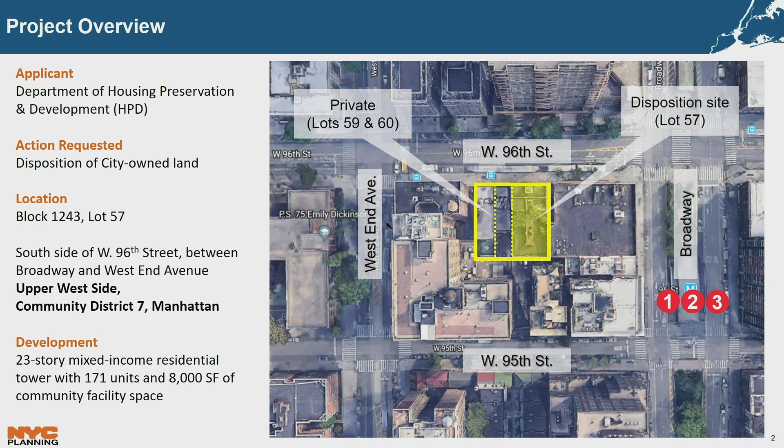The project sponsor and HPD are working to assemble a disposition site with 2 privately owned properties to the west, outlined in yellow, to construct a 23-story, 125,000 square foot building containing residential and community facility uses. Public financing is anticipated to be through HPD's Mixed Middle Income Program.

The surrounding area is characterized by mixed-use developments along Broadway, a mix of low and mid-rise residential buildings along West End Avenue in the mid-blocks, with several institutional uses scattered throughout the neighborhood. The Riverside West End Historic District is directly adjacent to the project area to the south and west.

The development site is located in an R10A contextual residential zoning district, which permits high-density residential uses subject to quality housing contextual regulations. For developments participating in the inclusionary housing program, a 12 FAR can be achieved with a maximum building height of 23 stories and 235 feet.

Currently, the development site consists of a 4-story decommissioned MTA electrical substation on the disposition site, highlighted in yellow on the right, a 2-story building owned and occupied by the Salvation Army on the lot immediately to the west, and a 2-story building owned by the NAACP Roy Wilkins Center just west of that.

The Salvation Army will occupy space in the new development, and the NAACP has opted not to return to the site after construction.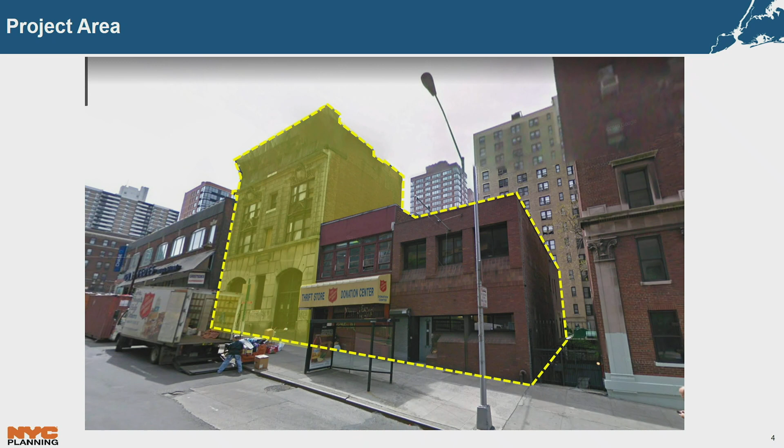The proposed development will consist of a 23-story mixed-use building containing approximately 171 mixed-income rental units with a mixture of micro units, 1-bedroom, and 2-bedroom units. Approximately 40% of the units, or 68 total units, will be permanently income restricted for households earning between 50 and 130% of area median income.

The proposal includes approximately 8,000 square feet of ground floor community facility space, 6,500 square feet of which is intended to be used by the Salvation Army. The project will include several amenities available to all residents, including a gym, 3,400 square feet of indoor amenity space, and an outdoor terrace.

Tomorrow will also serve as the hearing for the draft environmental impact statement. The DEIS identified significant adverse impacts with respect to historic and cultural resources, particularly architectural resources, as the building on the disposition site is one of the 8 original substations that powered New York City's early subway system. To mitigate adverse impacts, the project sponsor has pledged to incorporate significant features of the substation design into the new building.

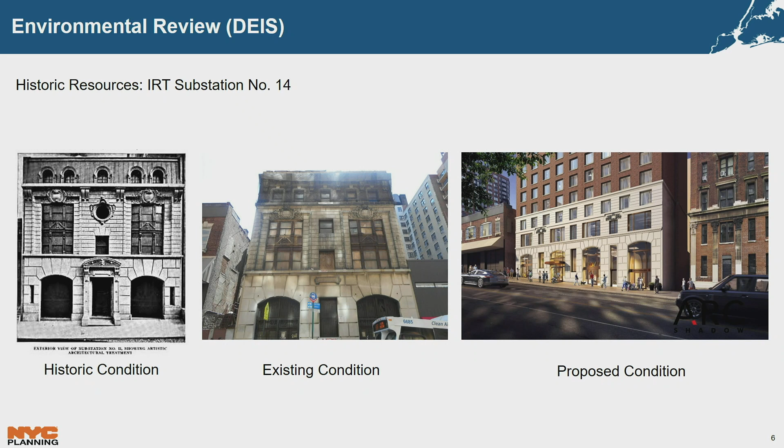This application was referred by CPC to Manhattan Community Board 7 on October 28th, who considered it at their December 17th meeting. The Community Board voted to approve the application with 2 conditions and 2 strong recommendations, with 36 in favor, none opposed, and 3 abstaining.

The conditions would require the developer to reach out to local nonprofits to ensure that local residents, in particular seniors, are made aware of the availability of the affordable housing opportunity, their eligibility to apply, and provide assistance when submitting applications. The developer is also obliged to form a construction coordination committee to include neighbors and members of CB7, convening at least once a month to ensure that construction proceeds with minimal disruption.

Apart from these conditions, the Community Board also strongly recommends that the sponsor reserve at least 75% of the affordable units of each size for households earning less than 100% of area median income. This recommendation is in response to concerns that the project does not provide deep enough levels of affordability.

In addition, the Department of Transportation requires the local sponsor to maintain certain traffic calming devices, and the Community Board has asked the developer to maintain a curb extension at 96th and West End Avenue in response to safety concerns.

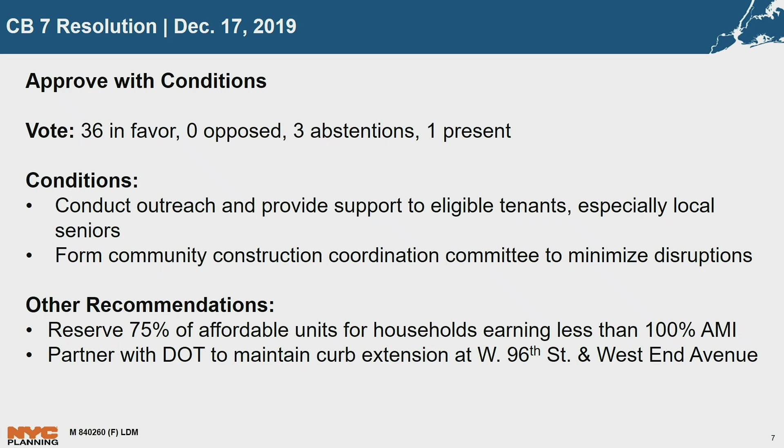We just received the Borough President's recommendation, so I wasn't able to update this slide, but she recommends disapproval with modifications and conditions.

One of her conditions being that a minimum of 65% of the units should be affordable. At least half of the affordable units should be affordable to households earning up to 60% AMI. And micro units should comprise no more than 15% of the total number of units in the project. I have copies of that we can have here after the presentation.

Commissioner de la Uz: I won't be here, but it would be helpful to know whether or not the development team has looked at— micro units are a relatively new thing, and my experience has been that depending on the level of AMI that's targeted for the unit, the turn down rate and the turnover rate is quite high. So it would be helpful to know what level of research they did to determine the mix of the micro units and what targeting they're doing on the AMI, so that we don't squander a very valuable resource.

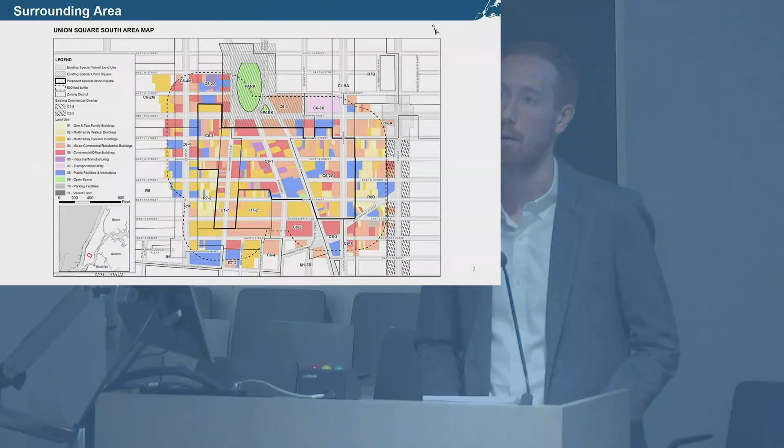Recently in the area, there was a construction of a hotel, the Moxy Hotel, which is on 11th Street. Many community members believe that this hotel was out of context in the area, and so this is the type of development that would then undergo the special permit if this were to be approved.

For the actions, we have a zoning text amendment that would extend the existing Union Square Special District, shown in blue, to the area south, which is peach or red, in subdistrict B. Within subdistrict B, this is where the hotel special permit would apply; in subdistrict A, it would not. The existing regulations of the Union Square Special District would continue to apply in subdistrict A, and would not apply in subdistrict B. The special permit would apply to new hotels, conversions, and enlargements.

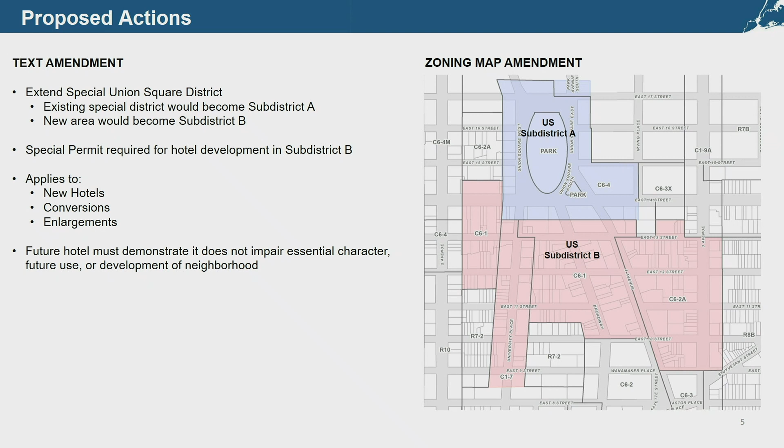In public review, this was referred to 3 different community boards. Community Board 2 and 3 recommended disapproval of the application with conditions. Community Board 5, because there are only 3 lots located within this special district, deferred to Community Boards 2 and 3. We're still pending the recommendation from the Borough Board.

Some of the conditions listed in Community Board 2 and 3's recommendations related to existing zoning and development. Both requested a rezoning to a lower density district, either commercial or residential. Both believe that the area is overdeveloping with commercial uses, and noted that high-rise development would replace low to mid-rise development. They stated that the area should be rezoned with inclusionary housing, but also with height limits between 80 and 120 feet. Community Board 3 specifically called out the 3rd and 4th Avenue corridors, which should be contextually downzoned, continuing with the commercial designation, but at a lower density.

With historic resources, both boards believe that the EAS should recognize more buildings as historic resources, including some within the projected development sites. I'll note that the department, in consultation with the Landmarks Preservation Commission, did issue a revised EAS. There were some updates for clarity to the historic resources section for figures and tables. The conclusion that this would not result in significant adverse impacts remains.

Community Board 2 and 3 both believe that the area should be designated a historic district and that more buildings generally should be landmarked. Community Board 3 also stated that the findings to obtain a hotel special permit should be more stringent. And with that, I'm happy to take any questions.

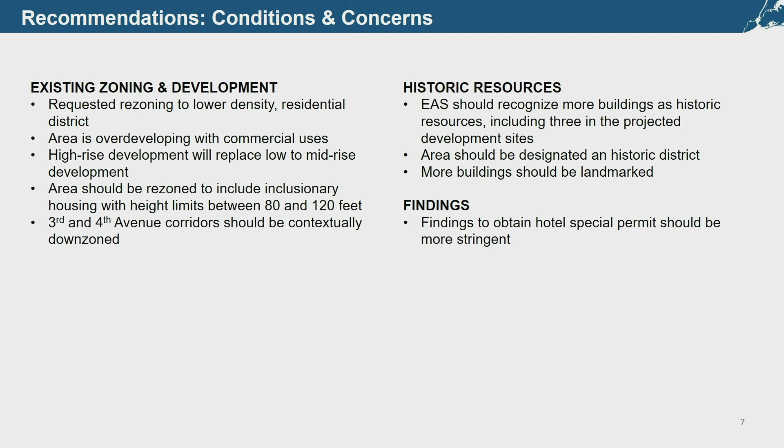For future votes for tomorrow, Wednesday, January 22nd, staff have prepared reports for 503 Broadway, 46-74 Gansevoort, 2513 through 2523 Avenue O rezoning. Also scheduled for a decision on Wednesday are 18, 24, 28 Bedell Avenue, 29 and 31 Everton Avenue, 585 Lamont Avenue, 301 Sheldon Avenue, 70 Cedar Terrace, 74 Cedar Terrace, 536 Sinclair Avenue, Edinboro, or 238 Edinboro Road, and the Greenfield Residence 3 Alderbrook Road, and 5051 Iselin Avenue.

No further questions. Moving on to Wednesday, February 5th, 2020, staff are preparing reports for 47 West 28th Street Building, 49 West 28th Street Building, 51 West 28th Street Building, 53 West 28th Street Building, 55 West 28th Street Building. All of these are the Tin Pan Alley landmarks.

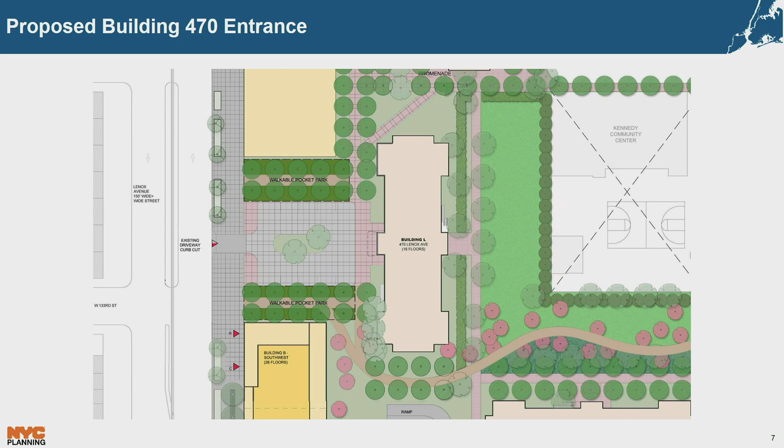Oh sure, I don't have an elevation, but we have a rendering—this is standing at the corner of 133rd Street and Lenox Avenue. That's Building 470, the base of the southern tower, and this is the base of the northern tower. So this opening is the combination of the cul-de-sac and the proposed pocket parks on either side with pathways.

Not shown in this rendering are vehicles parked, and the proposed cul-de-sac does provide for parallel parking of vehicles, as the previously proposed design also allowed for parking in this area.

And the height of this building on the corner of 135th and Basil Patterson Way, which is what it's called now—Lenox and Basil Patterson Way—what's the height of that? This tower? Yeah. This is shown at 284 feet. Well, that is the permitted max envelope. I will confirm that that is the height of the tower being shown.

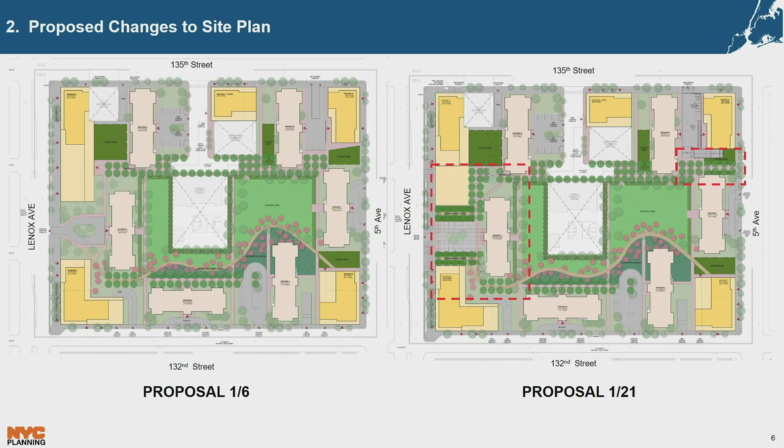Commissioner Levin: Yeah, this is certainly a step in a good direction. I'm wondering about the historic significance of the current configuration of the cul-de-sac. It has a kind of narrower looping way through the space, and the current proposal just looks like a large expanse of pavement. I'm wondering what thought has been given to the historic aspects, the importance of retaining the current entrance configuration.

For 470, the same curb cut will be retained, it'll be the same entrance. So just to clarify, what you're noting is that this is just less pavement in the existing versus the proposed.

Like this is a more square shape, and it takes a longer loop around, which I understand is compromised by adding the two pocket parks on either side. But is this qualitatively changing the experience of the approach to 470?

Because I think I'm sort of defending the current approach, but have we reached the best possible compromise in balancing these modern needs? As we looked at it, what we heard was the importance of seeing 470 from the street, which runs up against wanting a stronger street wall along the avenue. And also, if one looks there today, it's a parking lot, and the antithesis of a strong street wall is a parking lot. So trying to balance all these pushes and pulls.

I would also just note, I think the primary difference between the two of these is the separation of the pathway that currently lines the driveway is being separated out as a pedestrian pathway, separated from vehicles, that more directly links to internal pathways versus a circuitous route to actually enter the site. That part is good, but it kind of concentrates the auto use in that center portion.

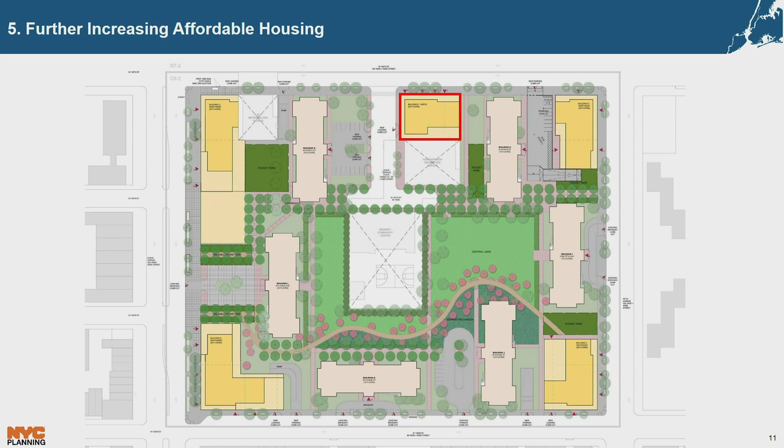Okay, and it doesn't appear as though that conversation will be completed by the time that we vote? No. Okay, thanks.

So concerns were raised by the commission about the relocation of existing retail and the activation of vacant store frontages prior to construction beginning. In the applicant's letter to the commission, the applicant states that they will endeavor to occupy vacant retail with pop-up or seasonal tenants, and they also provide a retail tenant plan outlining an approach to existing leases as well as new retail spaces.

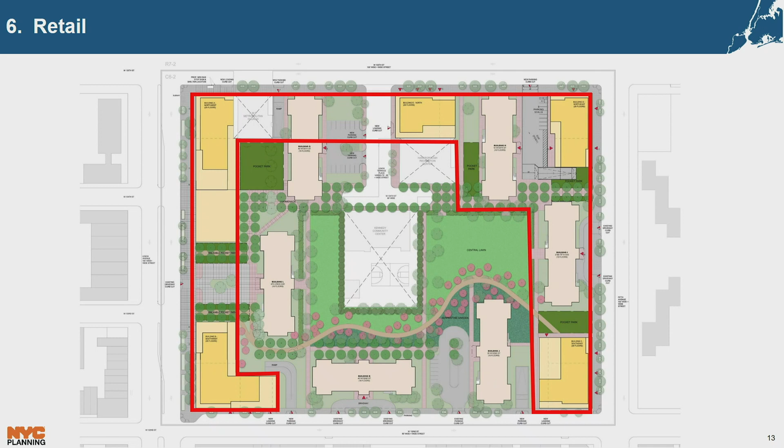Within the C1 district, commercial uses would be limited to local retail uses seen today. Use is limited to the ground floor, and variety stores, dry goods, and furniture stores are limited to 10,000 square feet per retail establishment. The largest possible ground floor commercial floor plate with the contemplated plan is in the northwest tower, at approximately 19,000 square feet. Overall, the applicant is proposing 130,000 square feet of retail and commercial use.

Yes. On the interim commercial uses, their letter mentions pop-up or seasonal tenants. But it just seems to me, especially with that 132nd and Fifth Avenue corner that has been vacant for so long, I wonder if it's even occupiable. It's probably not in the greatest shape.

Why don't they reach a little further than looking for commercial tenants? Aren't there some community organizations in the neighborhood? This can be a forlorn corner for a long time. I would urge the applicant to look at ways they could make this space available to activities and organizations that will enhance the neighborhood but may not be able to pay market rent. This would be an opportunity to activate a corner that is dormant, and perhaps give a leg up to some organizations that need help in the neighborhood, especially cultural ones. They haven't been drawing rents out of this corner for a decade. Why don't they just keep it up and use this as an opportunity for some community development work here? Okay, I will certainly relay that information to the applicant.

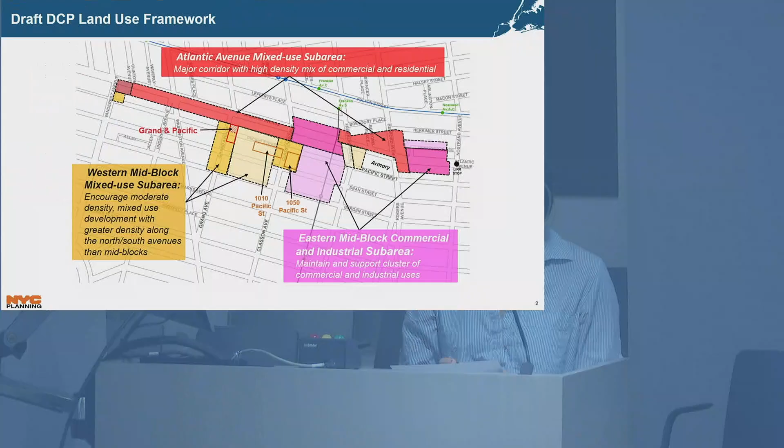There we go. This is a post-hearing follow-up for the Grand and Pacific rezoning, which is a rezoning from M1-1 to R7D C2-4. At the public hearing, the Commission heard from the applicant and the Community Board. In particular, the Community Board voted to disapprove this application with conditions, and the Brooklyn office would like to reiterate the appropriateness of the density here. This is the land use framework that DCP has developed in partnership with the Community Board. Grand and Pacific is highlighted in red and is within the Western Mid-Block mixed-use sub-area. The department believes R7D density is appropriate here, given that it's located on the short ends of the blocks, which can accommodate higher density. Additionally, R7D paired with the C2-4 overlay prohibits residential uses on the ground floor, which meets the community's objectives of activating the ground floor with non-residential uses.

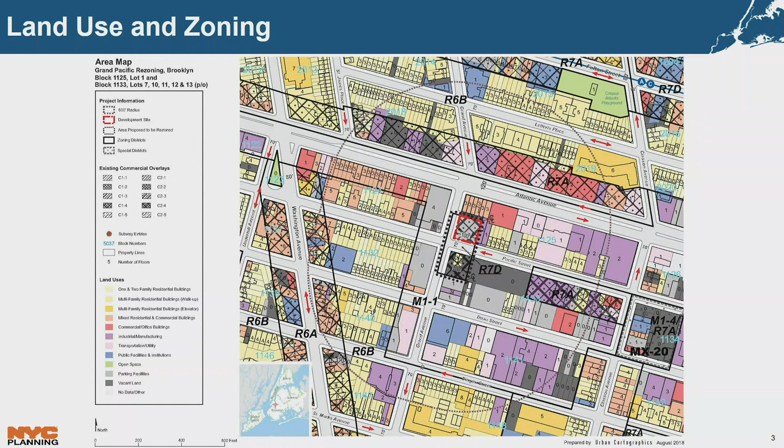Questions? Thank you. 271 Seabreeze Avenue, I believe there was a letter in your package. 8118 13th Avenue, is there any further questions on that?

Commissioner, you were recused, but you don't have to take off unless there are questions. Okay, I don't have anything. All right, that concludes the review session for Tuesday, January 21st, 2020. The time is 3:02 p.m.

I thought more people would be talking.